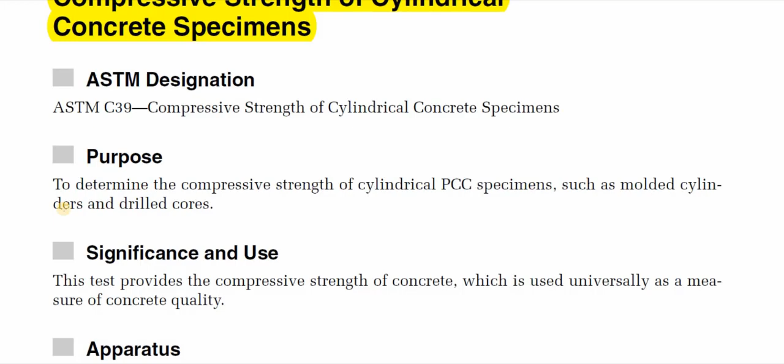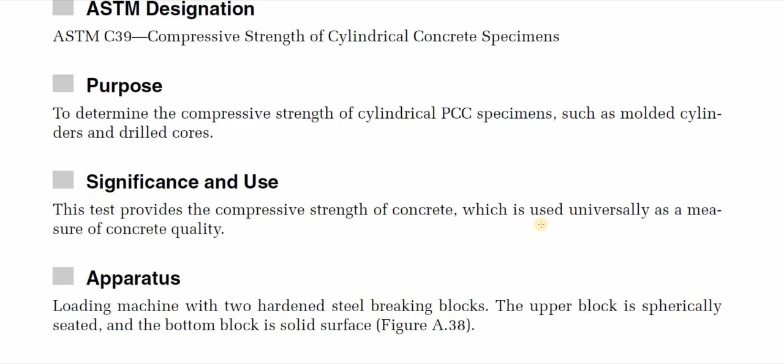The purpose of this experiment is to determine the compressive strengths of cylindrical Portland cement concrete specimens, such as molded cylinders and drilled cores. The main purpose and significance is to have a kind of quality assurance measure. This test provides the compressive strength of concrete, which is used universally as a measure of concrete quality.

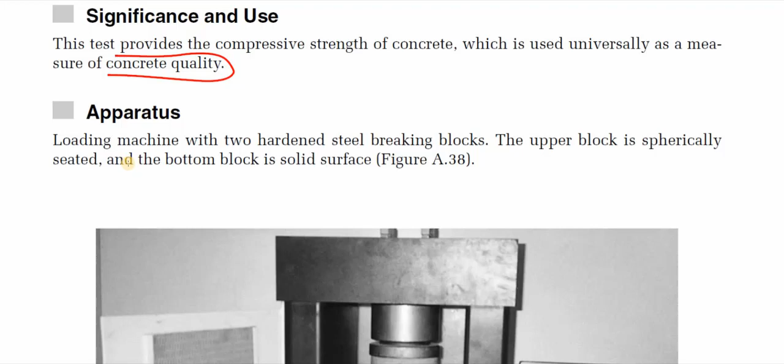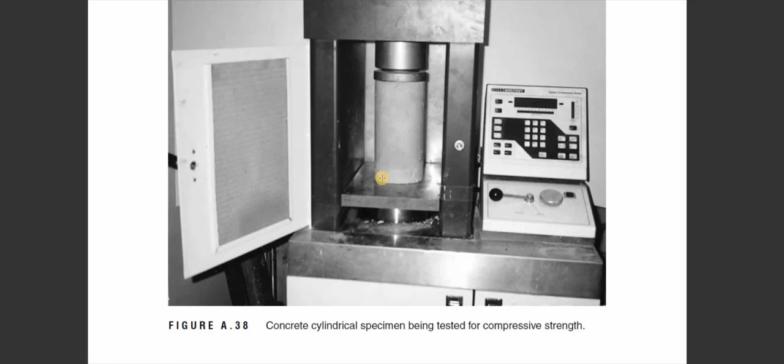The apparatus to be used is the loading machine with two hardened steel bearing blocks. The upper block is spherically seated and the bottom block has a solid surface, as seen in this figure. Let me zoom out so we can see the top part and the bottom part. This may be a UTM machine, different a little bit from what you have in your lab, but at the end we have the same setup: a cylinder from the top and a metal seat on the bottom, with loading applied by a CPU unit outside.

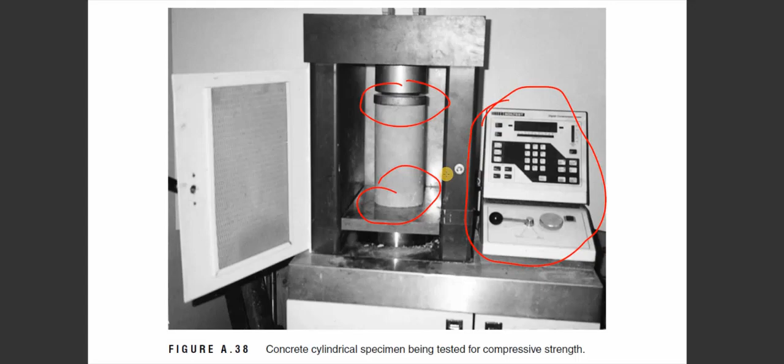Now let's go to the test specimens. The standard specimen size used to determine the compressive strength of concrete is 152 millimeters, 6-inch diameter, by 304 millimeters, 12-inch height, for a maximum aggregate size of 50 millimeters, 2 inches.

Smaller specimens such as 4-inch by 8-inch are sometimes used, but remember they are not ASTM standardized. We should use the 6 by 12-inch diameter and height.

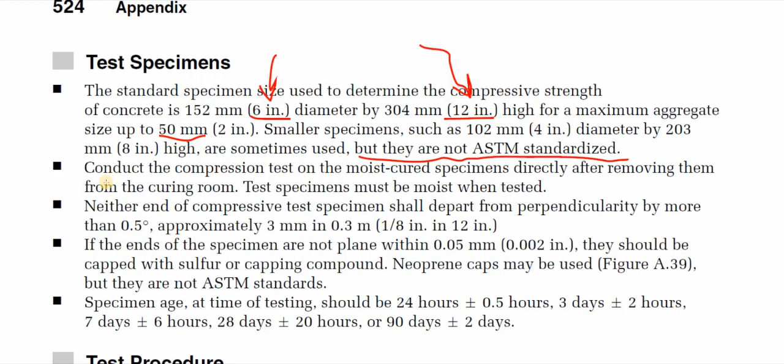Conduct the compression test on the moist cured specimen. Take care of this - it should be moist cured specimen directly after removing from the curing room. Test specimens must be moist when tested, not dry.

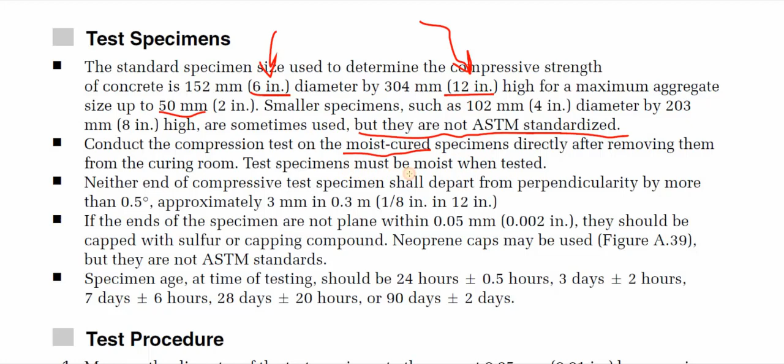Neither end of the compressive test specimen shall depart from perpendicularity by more than 0.5 degree, approximately 3 millimeters in 0.3 meter, or 1/8 inch in 12 inches. The main point here is the perpendicularity.

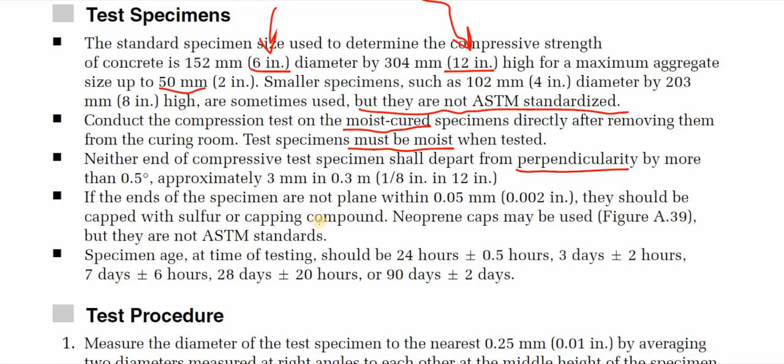If the ends of the specimens are not plane within 0.05 millimeter, which is 0.002 inches, they should be capped with sulfur or capping compound. Neoprene caps may be used.

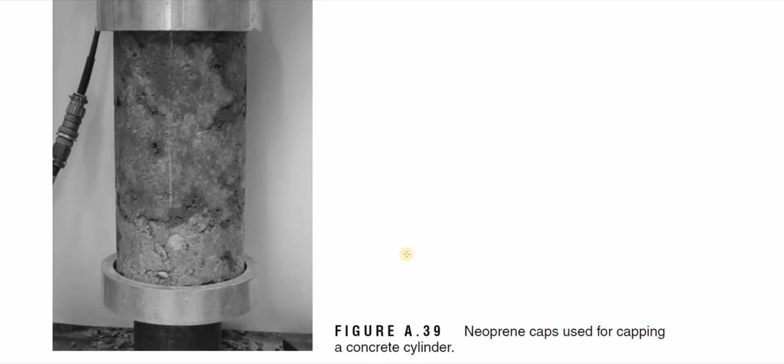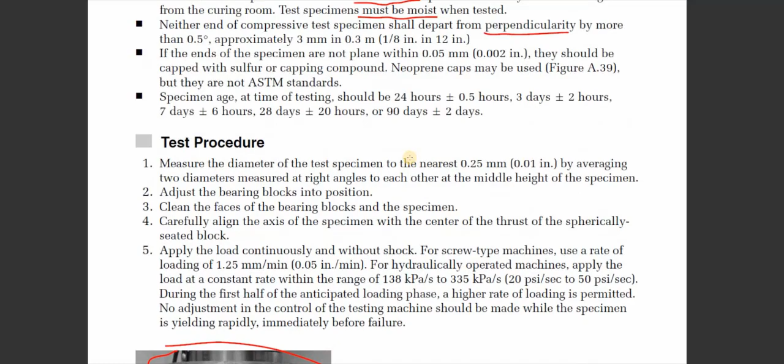As you can see in figure A39, these are neoprene caps used for capping a concrete cylinder. Let's zoom out - this is the top and bottom caps. But they are not ASTM standards, so if you are going to use these caps, keep in mind they are not ASTM standards.

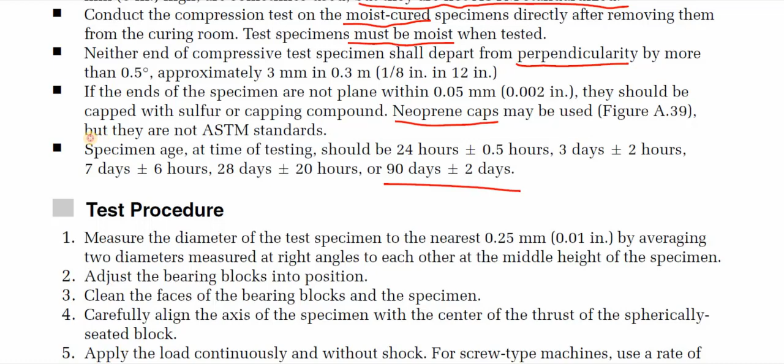Specimen age at time of testing should be 24 hours plus or minus 0.5 hours, 3 days plus or minus 2 hours, 7 days plus or minus 6 hours, 28 days plus or minus 20 hours, or 90 days plus or minus 2 days. These are the specimen ages - try to keep them as much as you can.

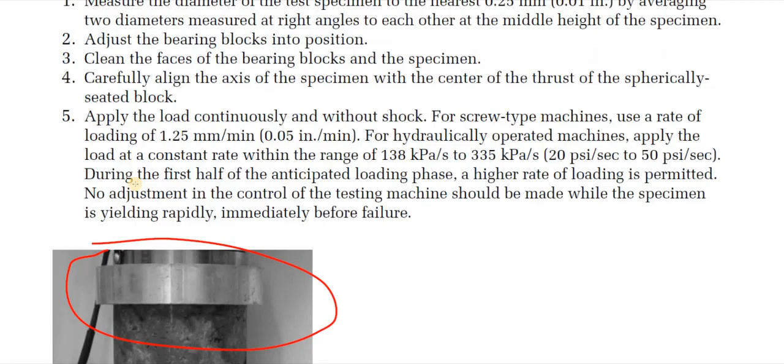Let's go to the test procedure. They are easy, like 8 points. First, we measure the diameter of the test specimen to the nearest 0.25 millimeter by averaging the two diameters measured at right angles to each other at the middle height of the specimen. This is important just to ensure that the diameter of the specimen is okay.

Adjust the bearing blocks into position. That's important - clean the faces of the bearing blocks and specimen. Carefully align the axis of the specimen with the center of thrust of the spherically seated block, which is the top one.

Apply the load continuously and without shock. For screw-type machines, use a rate of loading of 1.25 millimeters per minute, which equals 0.05 inch per minute. For hydraulically operated machines, apply the load at a constant rate within the range of 138 kilopascal per second to 335 kilopascal per second. During the first half of the anticipated loading phase, a higher rate of loading is permitted.

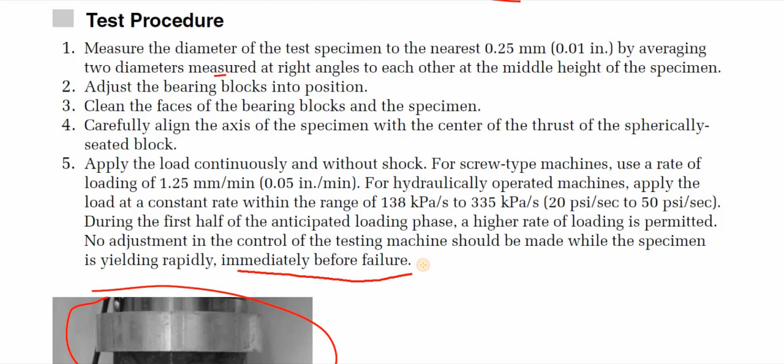No adjustment in the control of the testing machine should be made while the specimen is yielding rapidly immediately before failure. This is important - you need to keep the machine's rate as it is without modifications once the rate goes beyond half of the expected or anticipated failure loading.

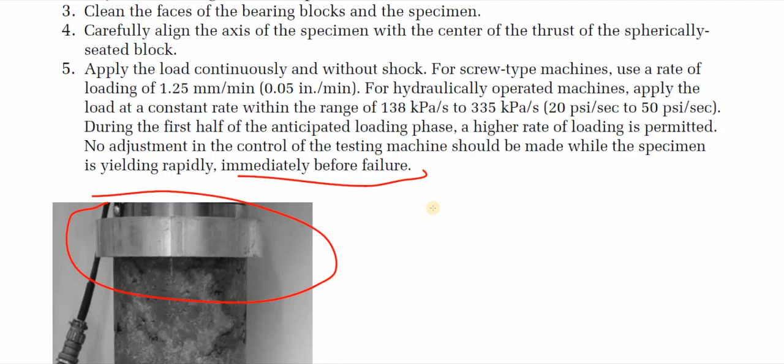After that, continue applying the load until the specimen fails. Record the maximum load carried by the specimen during the test - this is important because you need to know the maximum load. Note the type of failure and the appearance of the concrete.

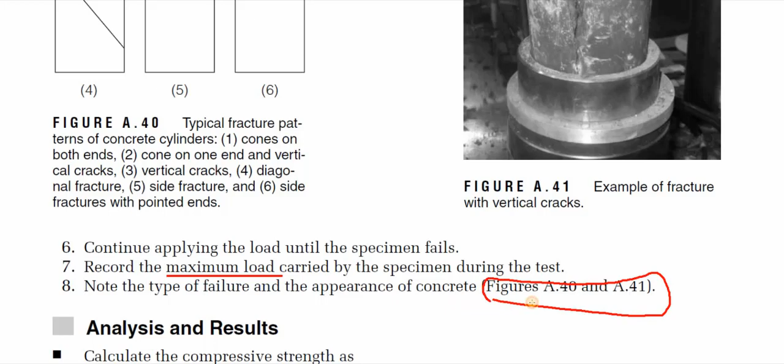Let's see what the types of failure are, as shown here. We have 6 main types of failure. Let's zoom out. The first type we call cones on both ends - as you can see, we find clear cones on top and bottom.

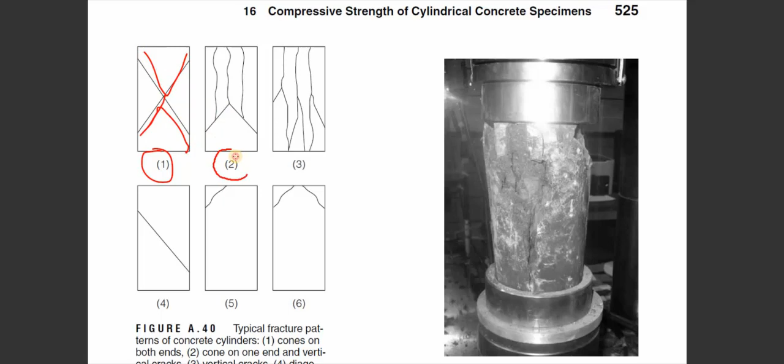The second type is cones on one end - a cone on one end and vertical cracks on the other. Number 3 is vertical cracks only - you cannot distinguish any cones here.

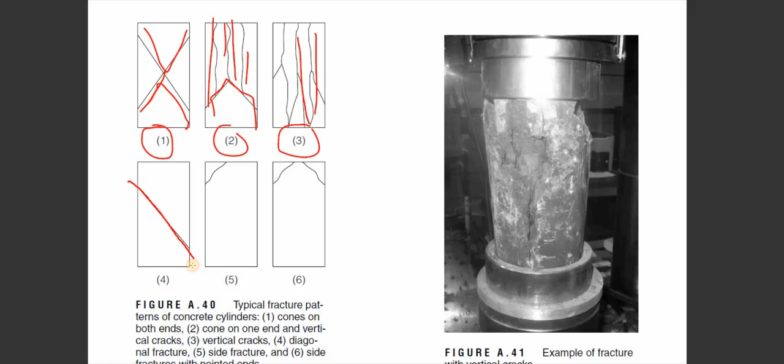Number 4 is diagonal fracture. Number 5 is side fracture at one part, and number 6 is side fracture at both ends - side fractures with pointed ends. This is the analysis and results section.

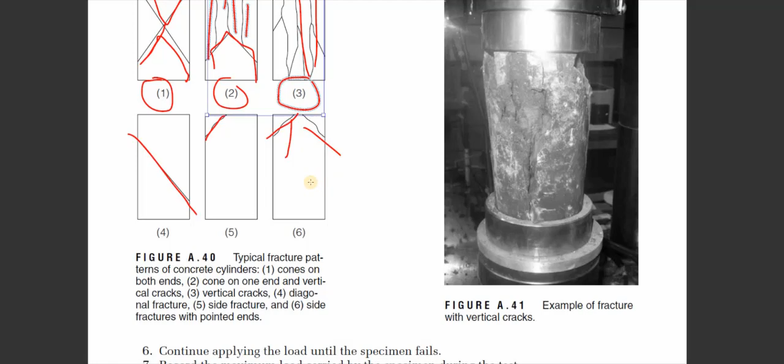We calculate the compressive strength as F prime C equals P maximum over A, where F prime C equals the compressive strength in megapascals, P maximum is the maximum applied load in Newtons, and A is the cross-sectional area in millimeters squared.

We report at the end: specimen identification number, diameter, and length if outside the range of 1.8 to 2.2 times the diameter, cross-sectional area, maximum load, compressive strength calculated to the nearest 0.1 megapascal, type of failure if other than the usual one, defects in either specimen or caps, and age of the specimen. This concludes our experiment for today.